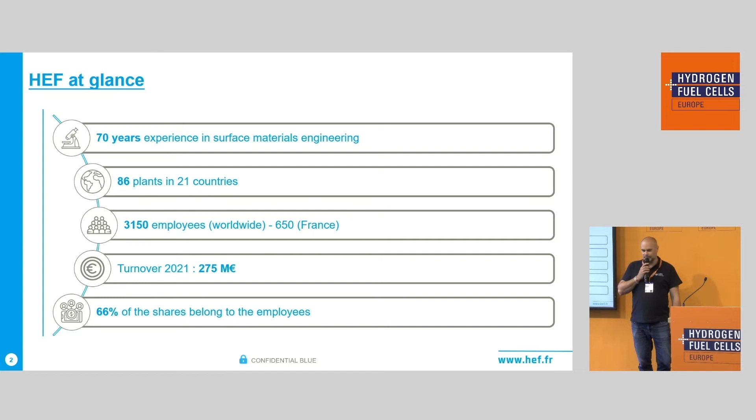And one small specific thing, the company belongs - at least the majority of the shares belong to the employees. So that could be interesting if you want to join.

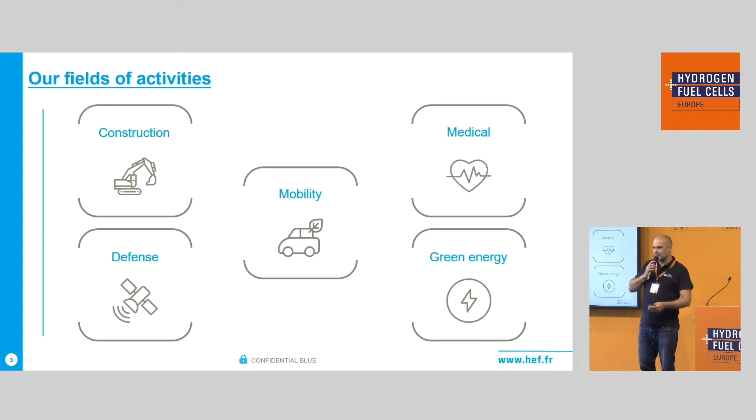So that's HEF. We are in many fields of activities. We will focus today on mobility, but of course today we have, let's say, 15 years experience of automotive world, doing millions of piston pins, for example, also finger followers, engine parts. You can imagine our turnover is quite dependent still on engine parts. We want to move to the next solution.

As I mentioned, tribology historically is a background. We diversified also in photonics, so coatings with optical features. Electric - you will find in there, for example, the coating for bipolar plates, but not only.

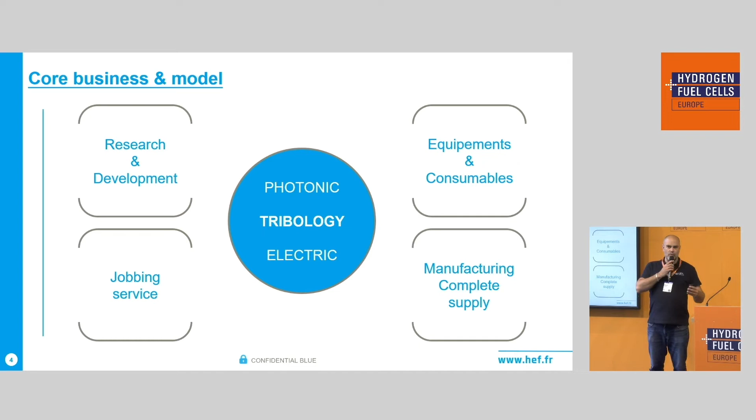And basically, what you see on the side is that we are vertically integrated. We produce our coating machines, we produce the coatings, we develop the coatings, we do the jobbing, and we have, of course, research and development and complete manufacturing supply, meaning that when we do something, we do it from the beginning till the end, including the robots, the automation, control, 100% control, camera control whatsoever.

Technologies - two main technologies at HEF today. Thermochemical process, nitriding - that's the big half of the activity. The big second half of the activity is vacuum process. And basically, out of this, we do some components, very limited, but still with some of our technologies, we do bushings, mainly bushings for construction equipment - big bushings, high loads, oscillating, big stress.

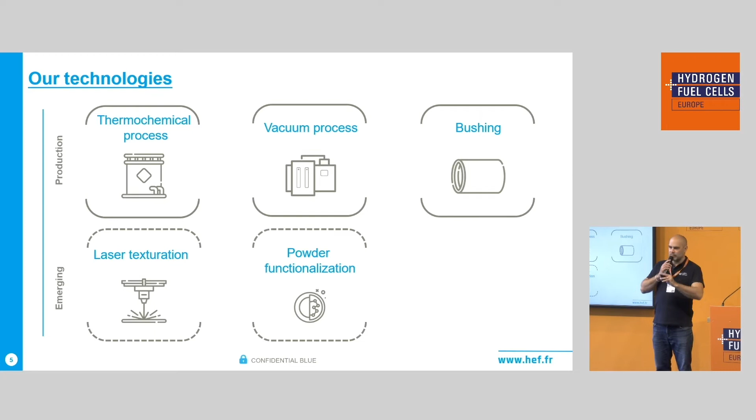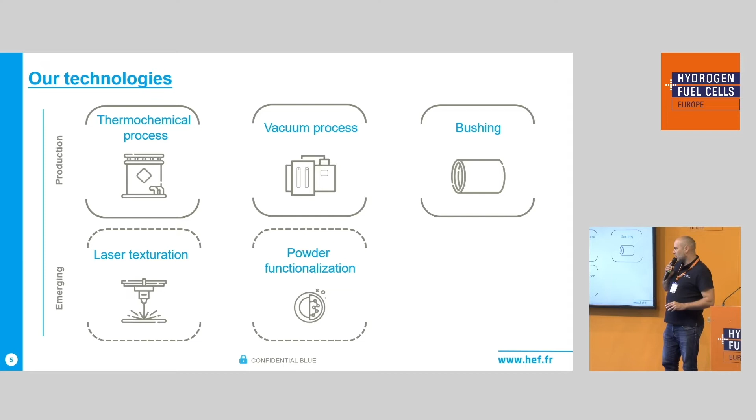And we are, of course, as a surface engineering company, we investigate new fields of development, and we like to mix things together, and we do laser texturation. We have some industrial applications and also powder functionalization.

Here's what it's all about today.

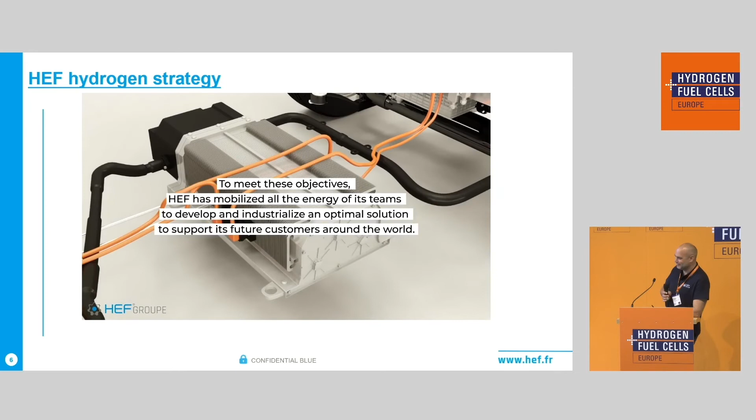Okay, so it's always like this - you do a 1-minute film, and the 10 important seconds are gone when you expect, to introduce your topic. But our moderator this morning introduced it right away, so I don't have to tell you - let's say, as a little teaser, that you need to wait for the film to know what we're talking about. So I'll explain it again.

We are talking about the coating on metallic bipolar plate, which was also explained shortly on the film. Why do we go into this market? We want to provide locally an economical, recyclable, and robust coating solution for metallic bipolar plates. You will see each of these words is important.

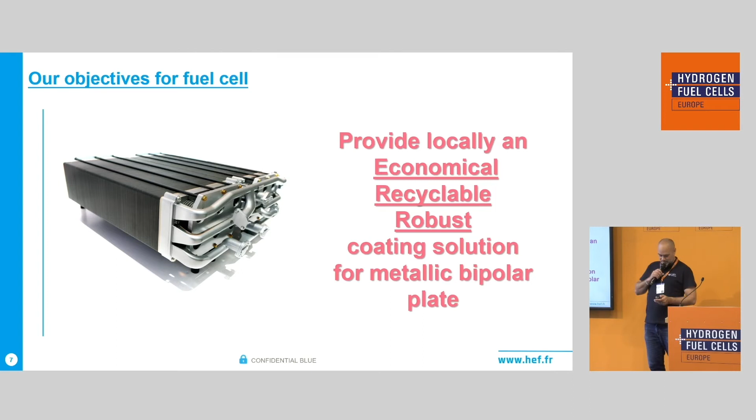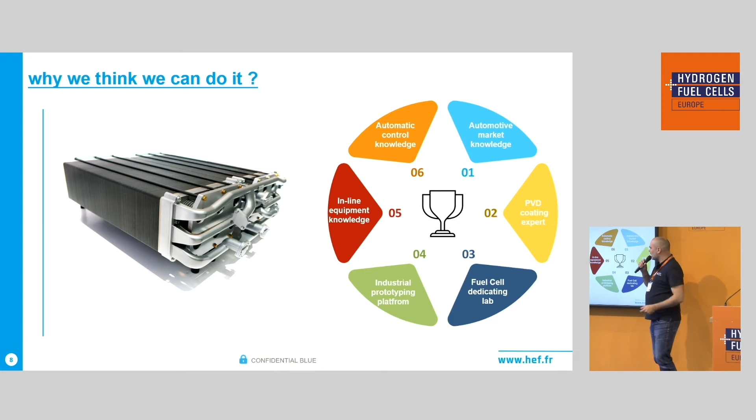Why do you think we are legitimate to do this? Basically, you need a lot of things to achieve that. You have to basically have, let's say, be first a PVD coating expert - that could help to start with. Automotive market knowledge, automatic control knowledge, ability to develop an inline equipment due to the geometry of the bipolar plate, and to industrialize a prototyping platform which we have already up and running to ramp up the production.

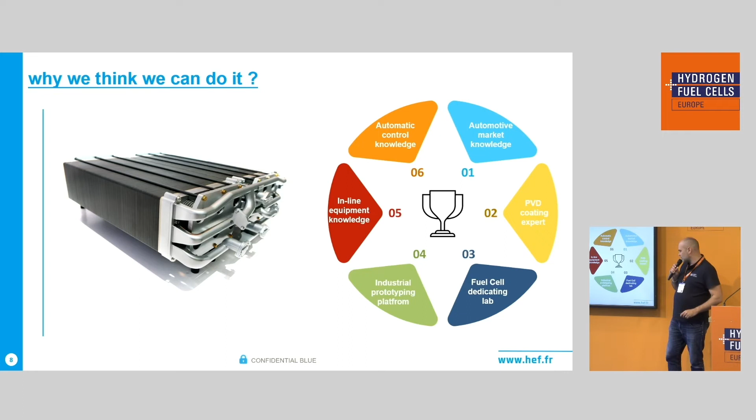And we had to invest also in a fuel cell dedicated lab, or I would say a bipolar plate dedicated lab - you will see why. A few basics, but I will go very fast.

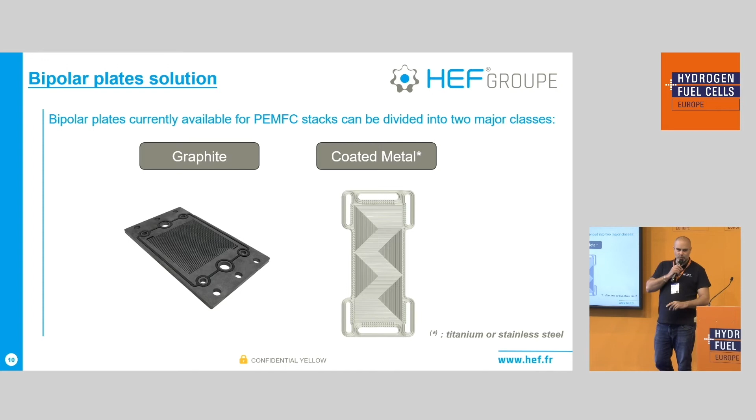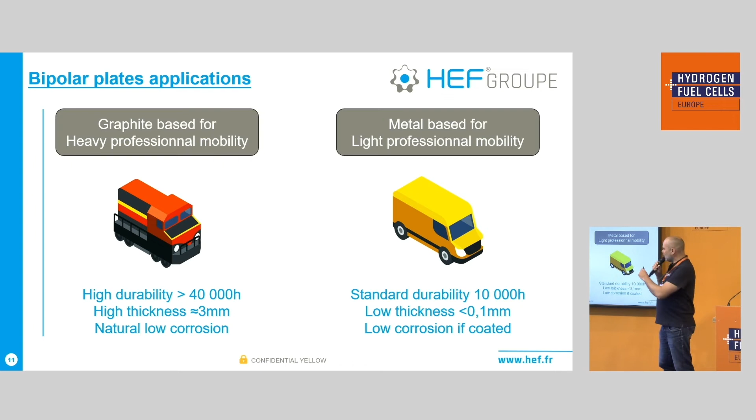There are two kinds of bipolar plates on the market today: graphite ones and metallic ones with coating, for two different types of applications. I discovered at this fair over the last two days that most people who were focused on one side or the other are now trying to cross over and check what the other solution can do. I think everyone is now much more open. We are focusing on metallic plates because you don't need any coating on graphite plates.

One other important thing to know: you have two solutions with the coating. Either you have a pre-coating solution, and then you form the plate with the press, or you do the opposite — you press, make the design of the bipolar plate, and then make the coating. We go for this second solution, post-coating.

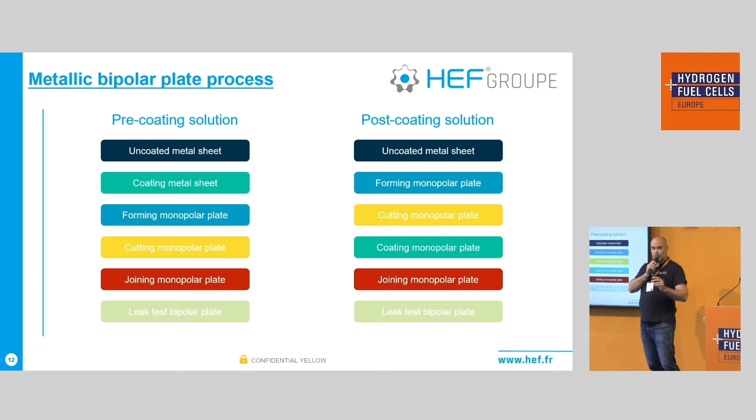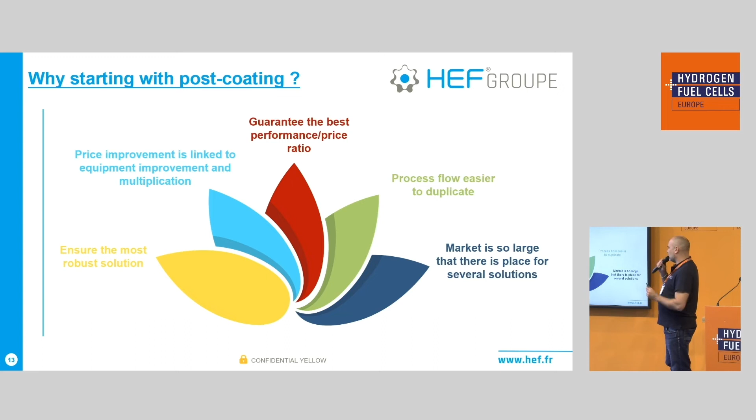Why? We believe with post-coating you will reach the best performance-price ratio over time, because we know a fuel cell has to be a high-performance power unit. It will ensure the most robust solution, and we get a price improvement when we multiply the different facilities. With a pre-coating solution, your facility is probably only in one location, and you're not able to go close to the customer. This is the business model we follow — we follow the customers, have small plants nearby, and can do the coating almost as if it was in your plant.

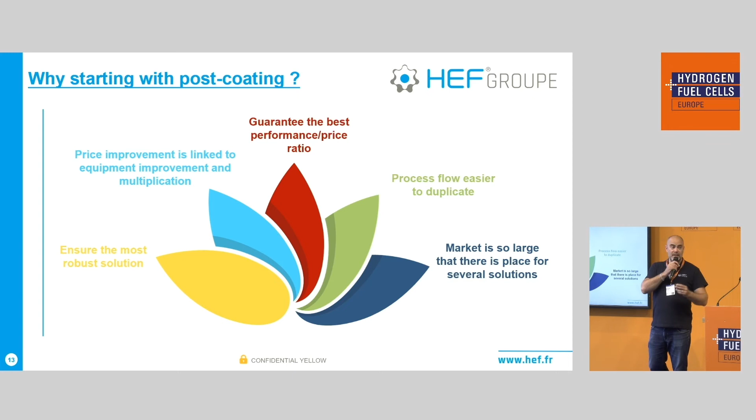More importantly, there are three important things we have to achieve as a coater on the bipolar plate. The first, the easiest, is good gas impermeability for the cell to function. More tricky, we have to ensure low resistivity — meaning low interfacial resistance of the plate — and also excellent chemical inertia. I will detail how we achieve these two with a carbon-based coating.

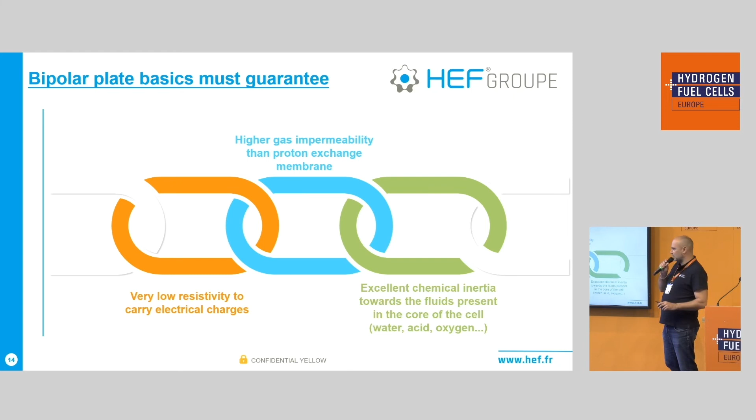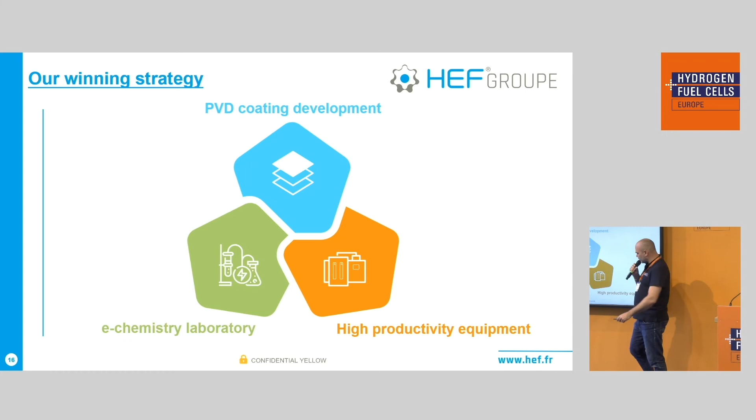This is the next part. For this, our strategy is the same as what we developed in automotive. We have to be good at PVD coating development, good at producing high-productivity equipment to get a good price for you, and in this case we also had to develop an electrochemistry laboratory. I'll focus on the coating.

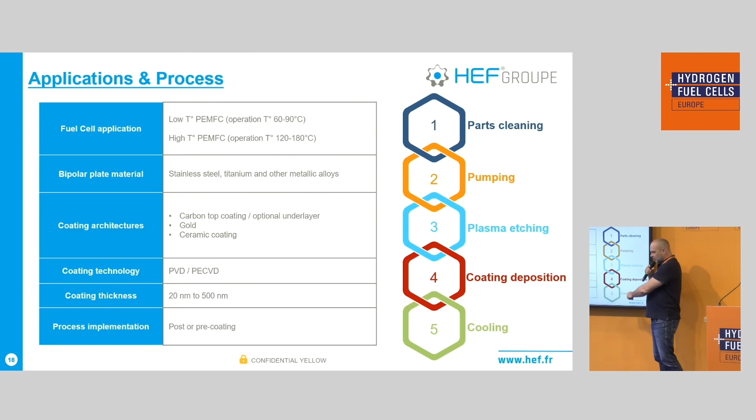A coating process is always basically the same: parts cleaning, pumping into the machine, making a vacuum, plasma etching, then plasma coating deposition, then cooling. I won't go too much into the details, but we developed, as I said, the electrochemistry laboratory. Basically, we have three types of tests to achieve. The ones we can do alone, ex situ — corrosion test, resistance measurement — and then we want to do characterization with the lab, including stress tests to check durability, and finally stack validation with the fuel cell maker.

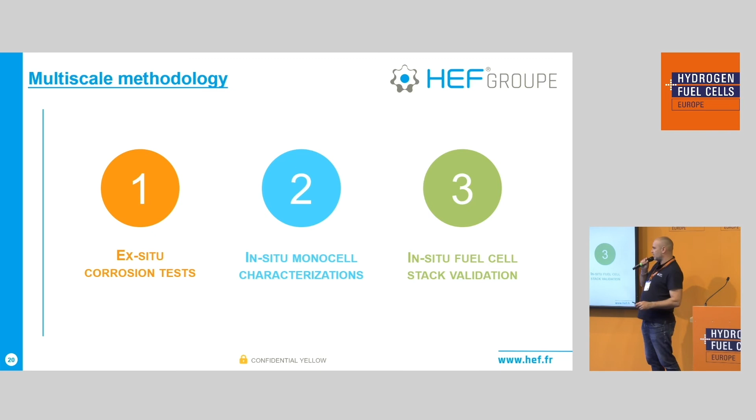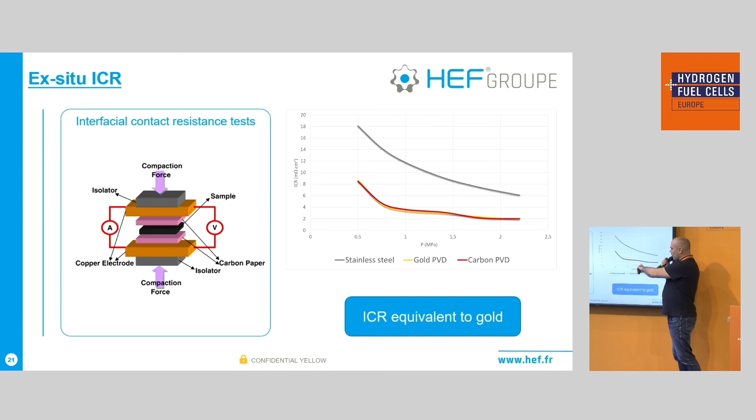So briefly, what we achieved: we have interfacial resistance as good as gold with a carbon-based coating. You can see we are low — the red and yellow curves are gold versus our carbon-based coating. Second, as I mentioned, it should be inert. Gold is inert, no problem, but expensive. We have a carbon which is almost inert and can be considered as good as gold for this application.

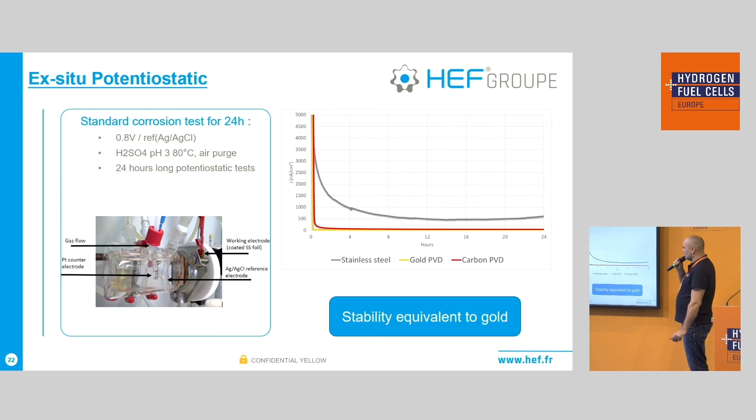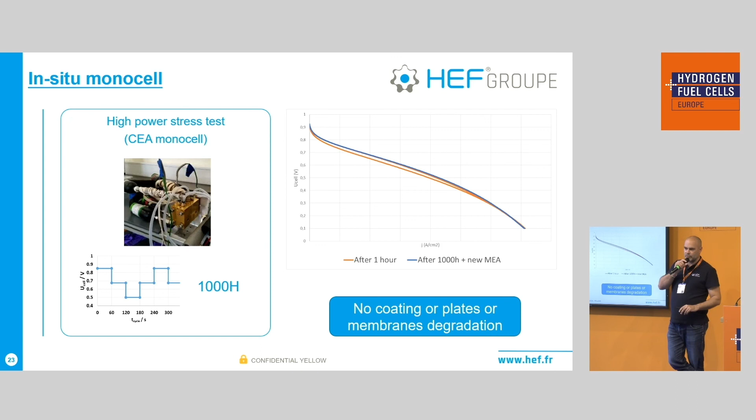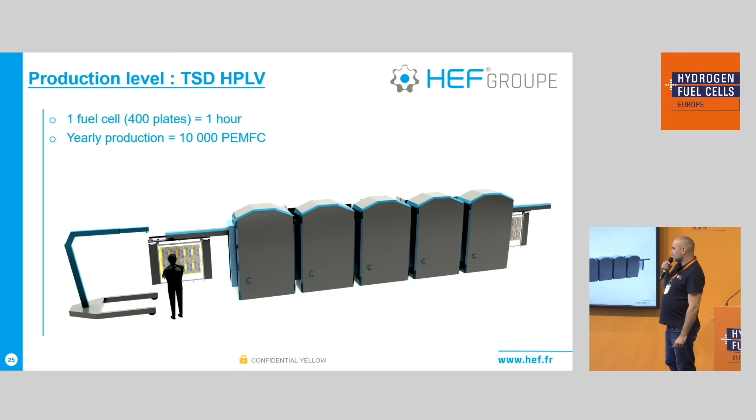Anyway, high productivity equipment — this is my last point. We had to develop this inline machine. It's slightly different from our batch process today, but the process is done in a different way. We want to achieve 10,000 fuel cells per year with one machine.

That was almost my last slide. We invested 25 million in this technology. And you can see, for example, if we have 5 machines like that by 2025-2030, that's about 50,000 PEMFC plates — really, we can stick to that.